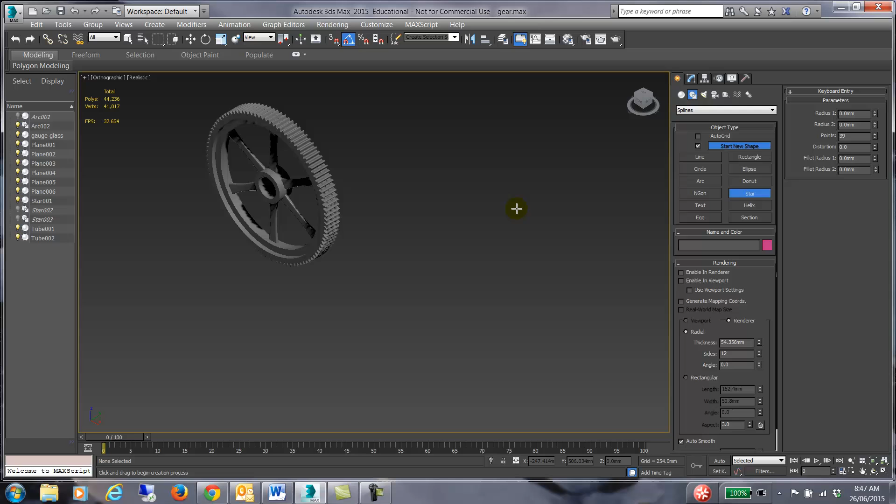Okay guys, today we're going to make a model of some gears. So we're going to start by turning the grid off and hitting F to get in the front view.

So the tricky part is the actual gears around the outside. To do that, we're going to click on Create, then choose Shapes, then Star, surprisingly enough.

Click in the middle there somewhere and drag out a star. It sets the first radius, and when you let go of the mouse button, it'll set the second radius, which we can adjust over here.

It also sets the number of points. Points can be from a very small value for a small star to a much higher value, like the example on the left there. Nick, are you paying attention?

Set the number of points to the way you want it, then adjust the second radius and then the fillet radius. If you give it too much fillet, it looks a bit weird, so just a little bit to round the top off and round off the bottom.

Once we've done that, we're going to hit the Modify tab, and from the modifier list, choose Extrude. Should be a fairly common term to you.

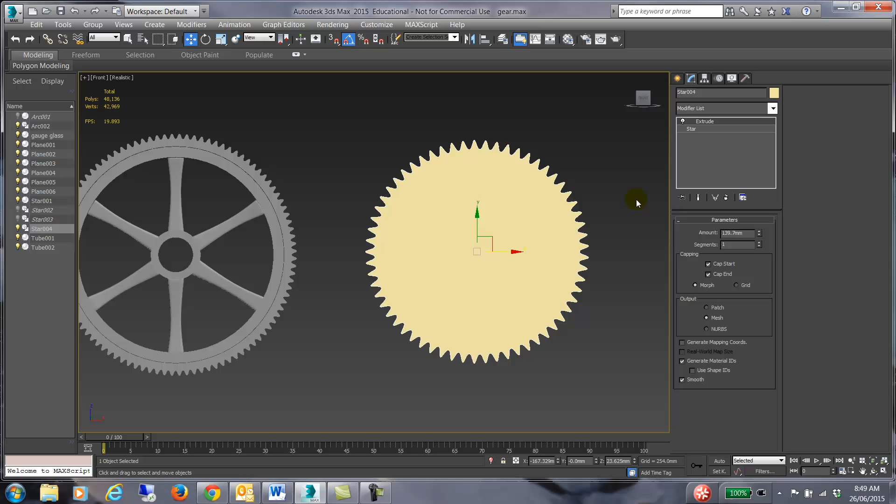It creates a 3D sort of shape there. You can set the amount of extrusion with this spinner here. It's about the only thing you really need to do.

I'm going to just apply my favourite material to this, makes it easier for me to work.

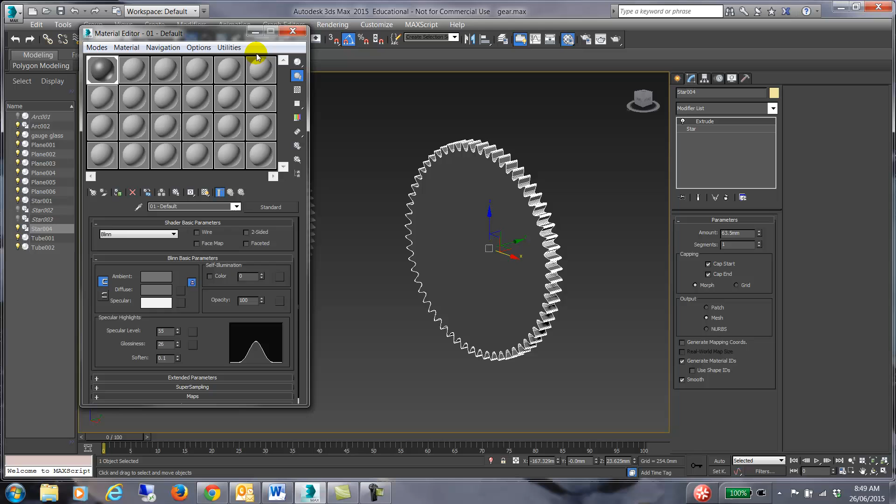The next thing to do is to convert this extrusion to an editable poly. Well, it's not really a conversion, it's putting it in a modifier stack.

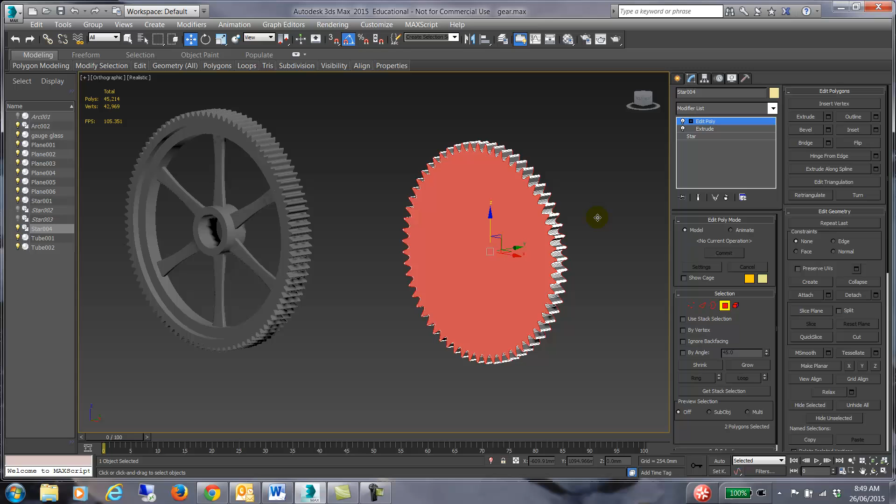So then select one face, hold down Control, select the other face, then find the Subdivision tab and hit Tessellate. That will tessellate the face, so it gives it lots more faces.

Press 1 on your keyboard to choose vertex selection, and then select the two center vertexes, so that's the one on the front and the one on the back.

After you've done that, go to the Chamfer settings button, click that and increase the value of the chamfer. Like so. Hit tick.

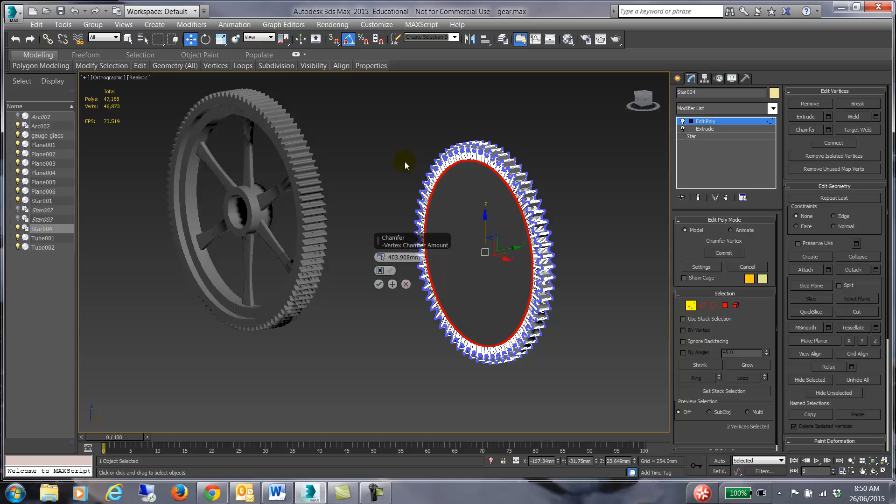Alright, so this is where I make a mistake, and I'm going to have to go and undo all of this. Yeah, see, not good. Too many vertexes.

So we'll undo it and get back to the point just before the chamfer happens.

Again, select the center vertex, go to Chamfer settings button, increase the value of the chamfer.

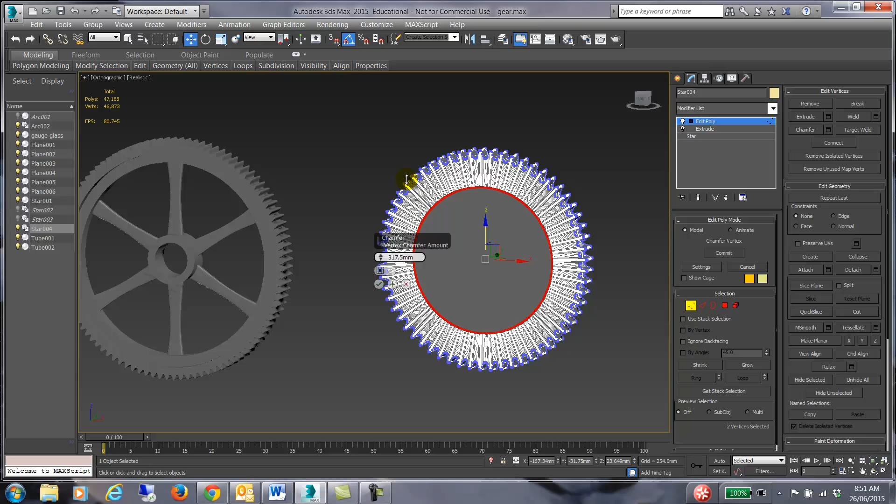Now while all of these verts are selected, you want to reduce the number of verts by welding them, so click on the Weld settings button and increase the threshold. If you increase the threshold too much, it'll weld them all together, which you don't want. You just want to reduce the number of them. Hit the tick. Very cool.

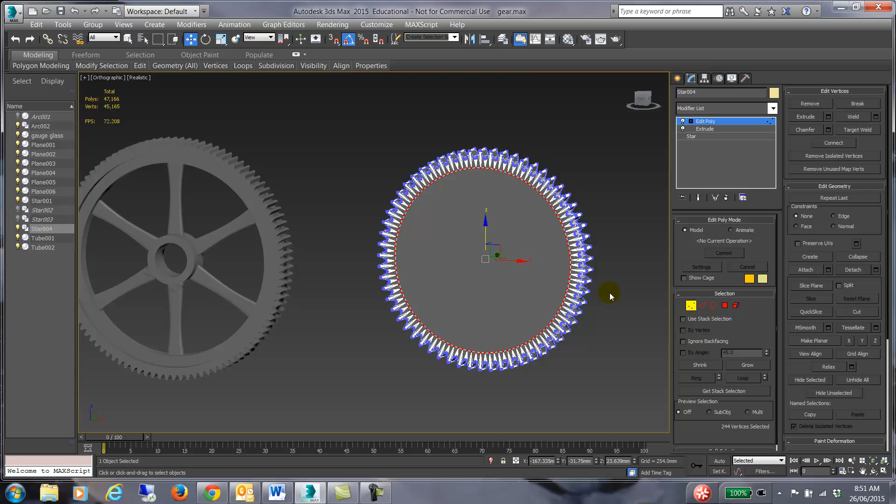Press 4 on your keyboard, which is the polygon selection, and click on both of those polygons in the middle and delete them. Okay, then press 3 on the keyboard.

Border select, hold down Control, select the other border, find the Bridge key and click on it, and that will bridge those two borders together. So that's the outside of that gear basically finished.

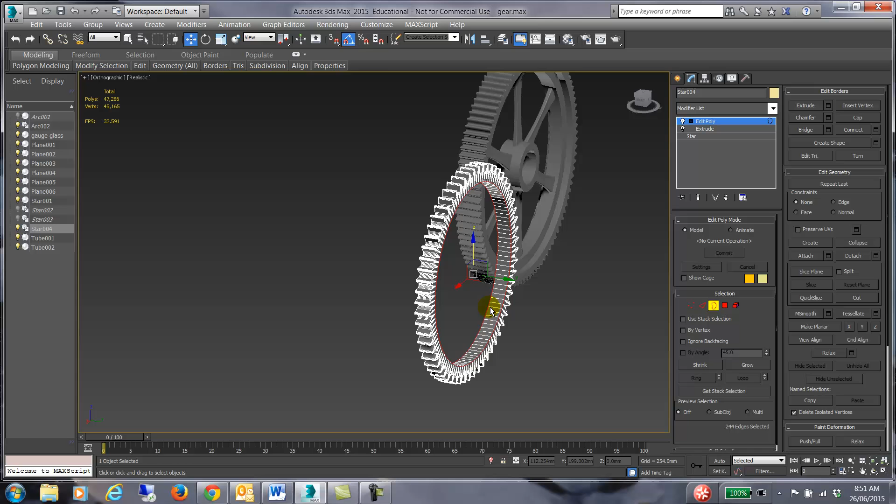Let's get it back in the front view, zoom it up.

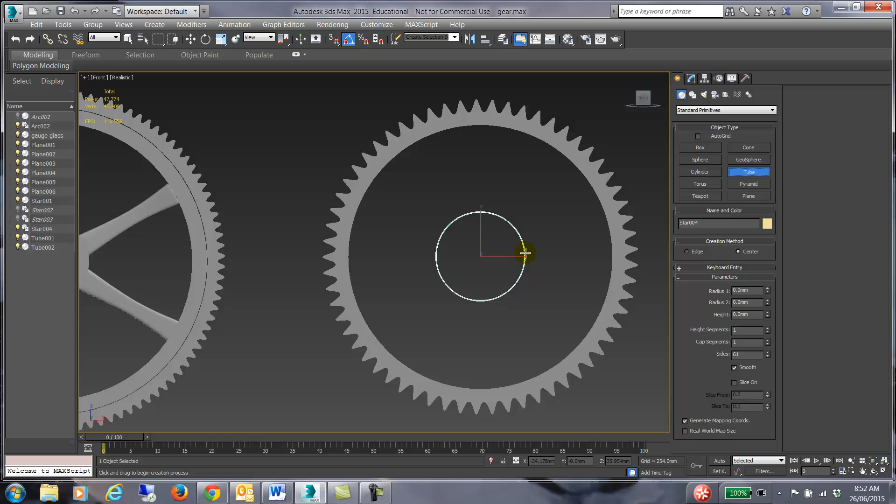So the next thing to do is to create the boss part that's in the middle. Go back to the Create panel, this is going to be fairly straightforward. Then Geometry, click on Tube, and roughly in the middle, draw out the size of the tube that you want to represent the boss of the gear.

Okay, pretty good. Hit M on the keyboard to get up the material editor, apply your material, close it.

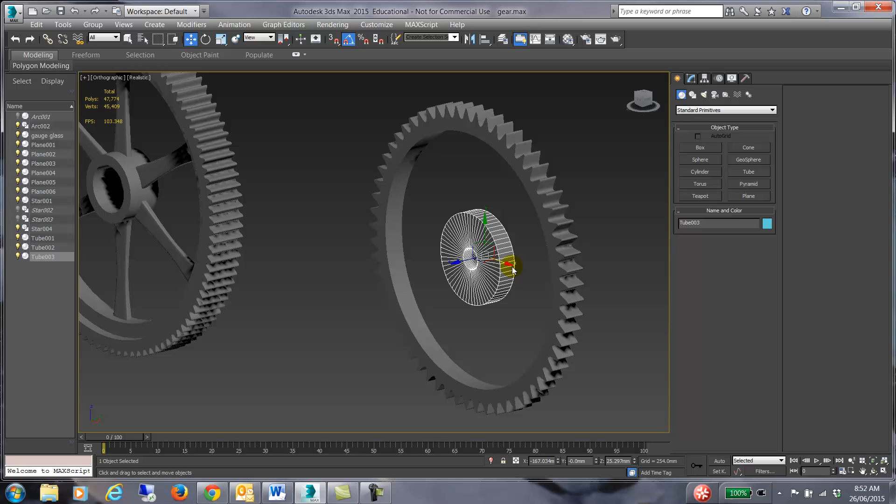That's been a pretty good spot, but I actually want to refine that, so I think I'll press Alt and A and click on the gear part and then choose the centers so that it's going to be aligned in the X, Y and Z axis. Hit OK.

All good. Alright, get it back into another front view. So hit F. Create another tube.

Again, doesn't have to be perfect. Oops, mistake, let's try that again. There we go.

So this part is going to be centered as well. Again, with Alt A, select the gear, and make sure you've got it set for the X, Y, and Z. It doesn't look right, hang on. Alt A again. Select the gear again. Make sure these are good.

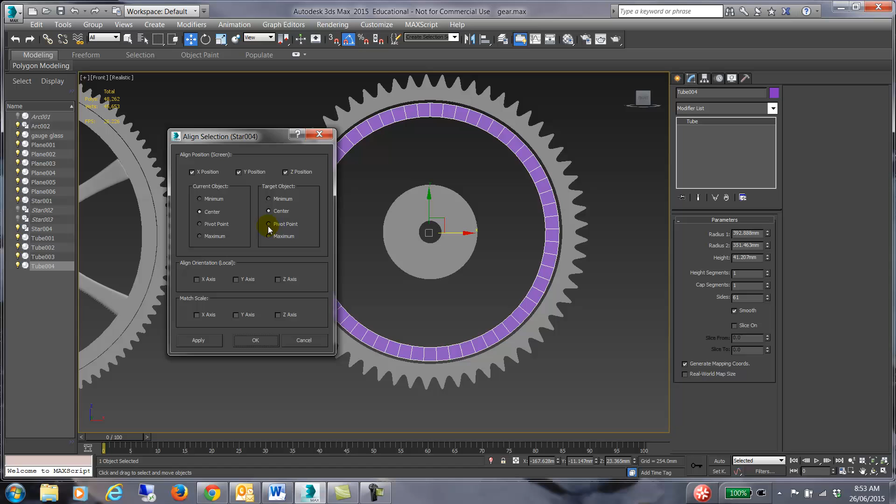Change the second one to pivot maybe. I don't know, say okay. Okay, it's done it this time, who knows why. So increase the outside diameter of this tube to match the inside diameter of the gear. It's pretty cool, it's in the middle, which is where we want it.

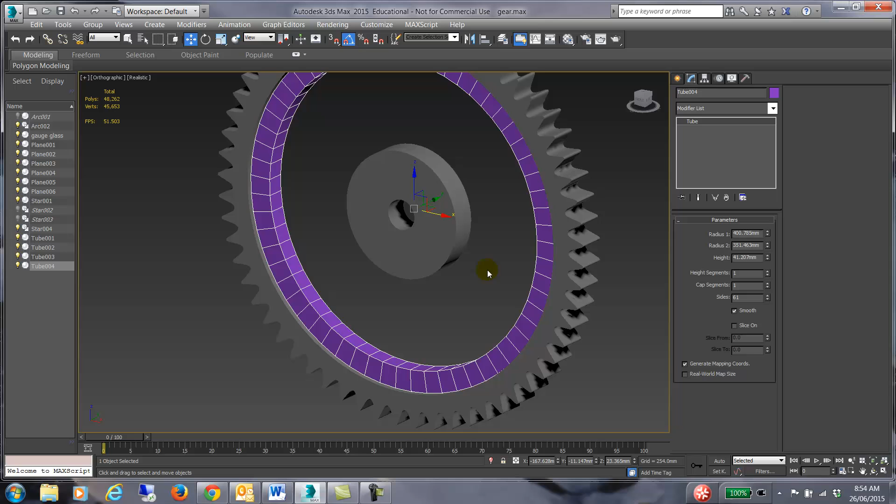M on the keyboard again. Apply your material to the selection. Close it, get it back in the front view.

Okay, now we're going to make the spokes. This is not edge modeling, this is called spline modeling.

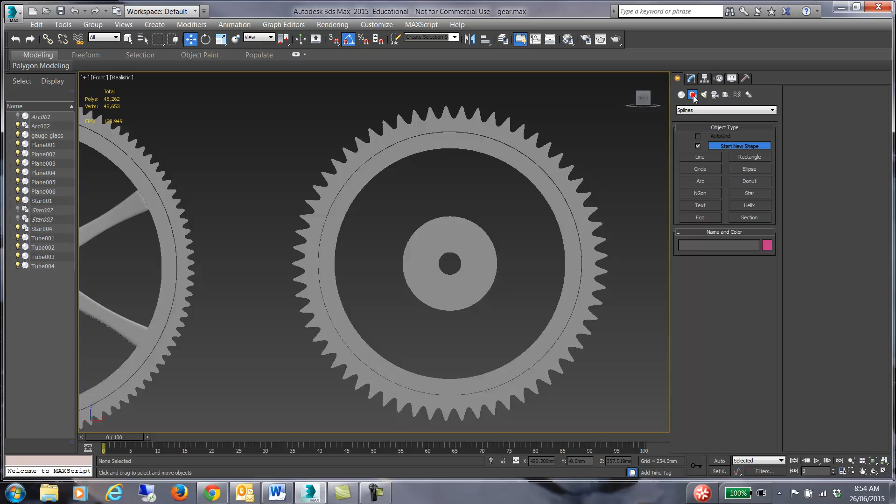So click on Create, Shapes, and then Line, and just click it up here. Okay, so I'm holding Shift down at the wrong time, and if you do that, you will get these very bizarre results. So you have to actually do this in the right sequence. Click, release the mouse button, hold down Shift, and it will draw a straight line upwards, like so.

Alright, click on the Modify tab. In the rendering pull-down, you want to click on Show in Viewport and also Show in Renderer. This will give your spline volume, and you can adjust the size of it. This is important.

Alright, I don't have enough segments in this at the moment, so I think what I'll do is convert this into an editable poly, put it into edge mode, and then connect those edges.

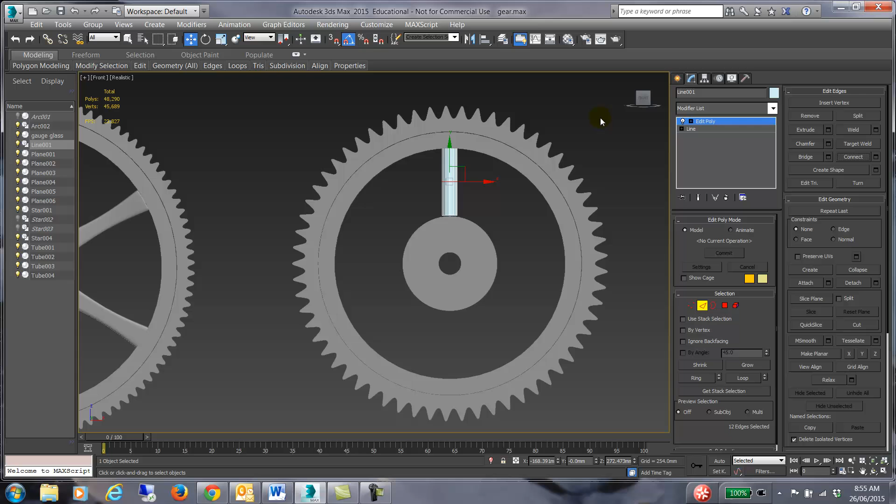So let's do that. If I type ED, it'll go very quickly to edit poly. There we go. Edge mode, select these edges, like so. Find the connect button, just a random connection's fine. So they're connected. Now I'm going to pinch those in a little bit so it's got a bit of form. So put it on the X and Z and drag it in, so that those edges will get pulled in together.

Okay, this is the wrong material and it's not quite in the right spot by the look of it. So let's apply the material again.

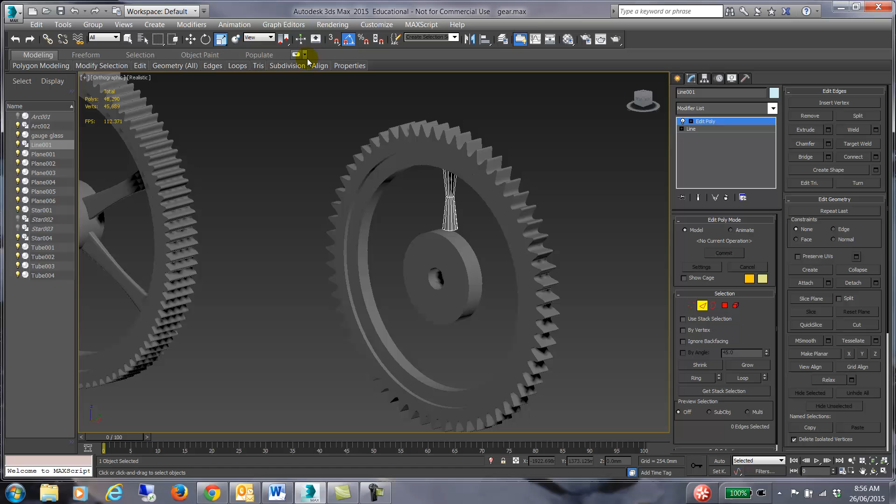Go to Align, select the gear. Notice we're always selecting the gear when we're aligning things, there's a reason for that. Make sure your sub-object is turned off. Do it again.

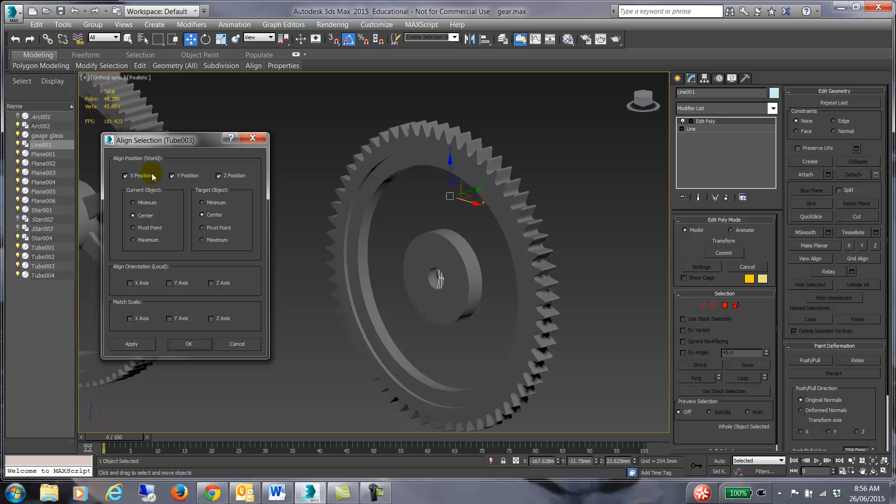Alright, so we don't want to align it in the X, Y, and Z axis. We just align it in the, I think that's the what? X, yeah, first. And that's still not quite right, so we'll align it in the X as well, I feel. So...

Okay, maybe not. Go to your angle snap settings now and change the angle to 30. The reason that it's 30 is because I want to have 12 spokes here.

After you've done that, go to the hierarchy tab, click on that, and then click on Affect Pivot Only. So now what we're going to do is we're going to move that pivot to be in the center of our assembly here. So as you can see, that's dropped it down. If you want, you can play with whether it should be centered to pivot point or whatever, but if it looks right, there's very, very likely that it is right.

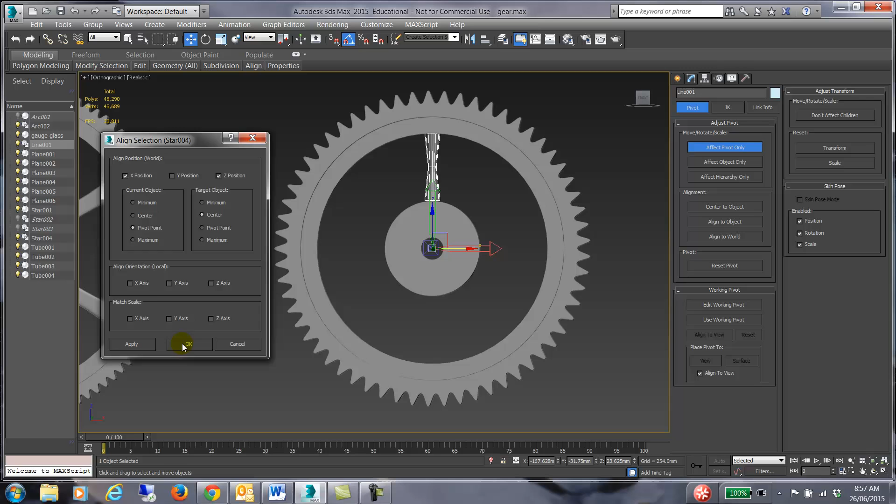Okay, so we're on the home stretch now. Take it out of the hierarchy panel back into modify, and make sure your snap settings are - angle snap is on up here.

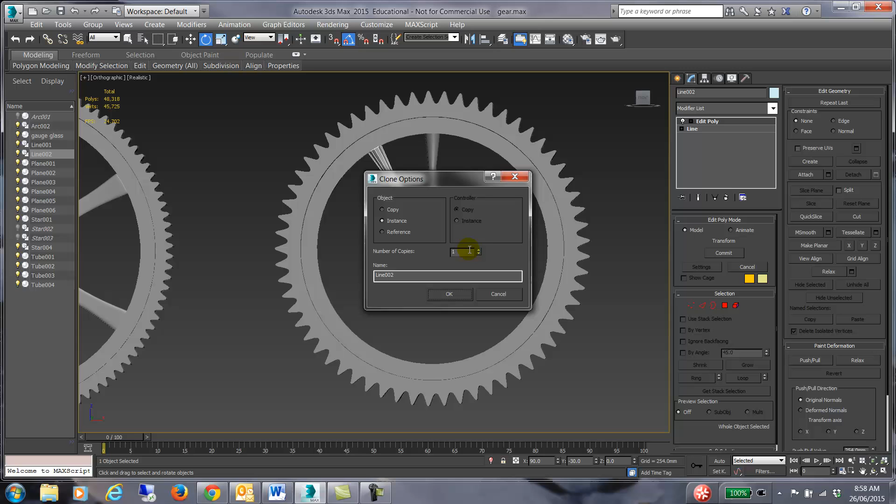Put it in rotate and rotate 30 degrees. Make sure it's on instance and that you're making 11 copies. There you go.